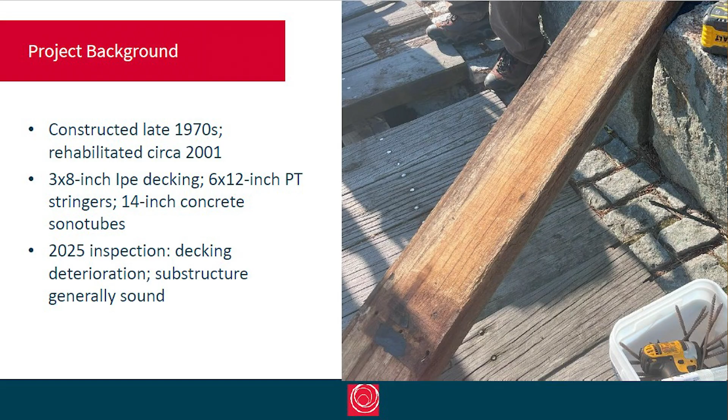The boardwalk was originally constructed back in the 1970s, initially with southern yellow pine. In 2001, a rehabilitation effort was completed that reused the existing substructure - basically anything other than the walking surface was generally reused. At that time, the city replaced the timber decking with 3x8 Ipe decking, a tropical hardwood. Underneath the Ipe, there are stringers that are pressure treated pine, and then concrete sonotubes, or foundations, that extend down into the soil, and that's what ultimately supports the boardwalk we walk on.

This past summer and fall, GEI completed an assessment where we actually took up some of the boards to evaluate them in their entirety, as well as look at the substructure - the stringers, the concrete sonotubes, and other elements underneath the boardwalk. Generally, we found the material not exposed to the weather to be in pretty sound condition, which was a really positive find.

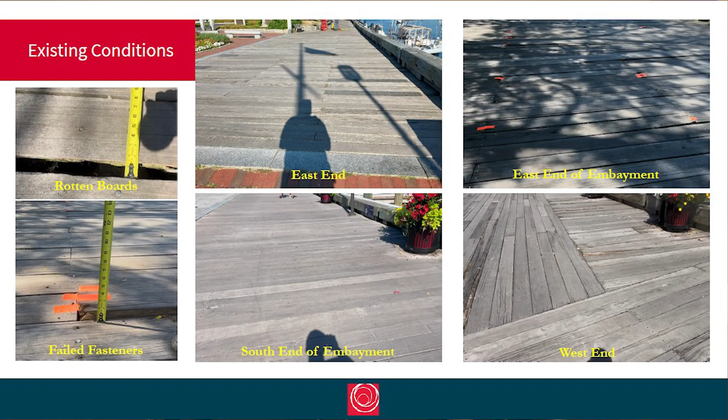Most of you have walked on the boardwalk. There's a lot of deteriorated deck out there. We observed a number of rotten boards and tripping hazards. Those are typically because fasteners that extend down into the stringers have failed—either water got down there and corroded the fastener itself, or the timber has failed in that immediate location. So those were the main items we found.

There's also some transitions between the hardscape around the edges of the boardwalk and the timber boardwalk itself that create elevation changes, which are potential tripping hazards. We also found some areas of the decking, particularly at the southern end of the embayment, that were really in pretty good condition and don't require a lot of overall attention.

So we tried to really holistically look at the boardwalk itself, evaluate what its current condition was, and identify the areas that could potentially be reused, and areas that would need some future repair work.

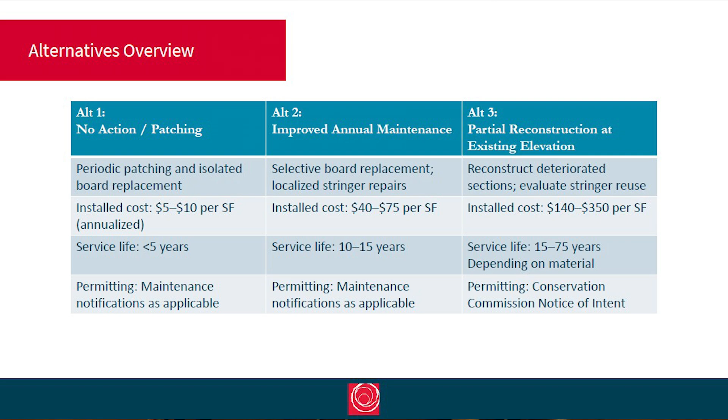Our tasking for the feasibility study included three alternative evaluations. The first being that we don't do anything other than what's currently happening out there—basically periodic patching. The second alternative is improved maintenance: securing timber out there, refastening, being much more proactive in the approach. The final alternative is to partially reconstruct the boardwalk at the existing elevation.

Each of those have different costs associated with them, as well as their overall service life and required maintenance on an annual basis.

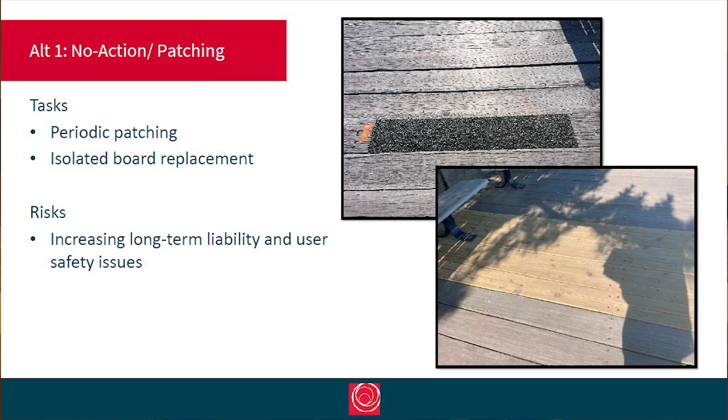So alternative one, the no-action patching, would just involve going out there as currently exists, periodically patching. Some of that is replacing timber boards themselves, or using—you'll see some areas out there with flexible pavement, kind of like a rubberized pavement—or other alternatives.

This really has long-term liability risk for the users out there. We're going to continue to have safety tripping hazards consistently popping up. But it is an option—it's the lowest cost option that is out there.

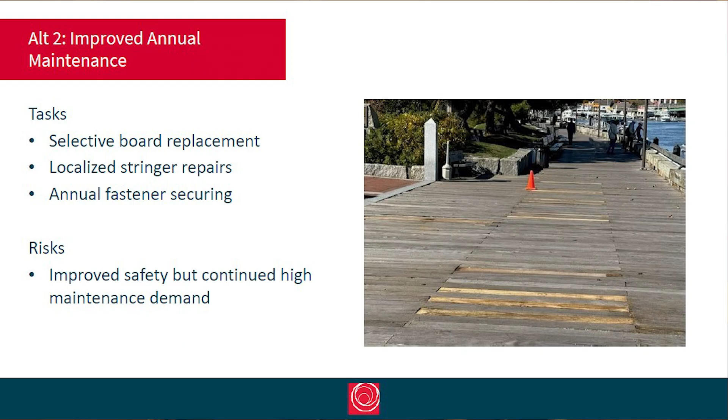Alternative two is improving annual maintenance. This would involve going out there, selectively replacing boards that have rotted. If there are stringers needing repair, working to replace those stringers, and then securing the fasteners and providing annual fastener maintenance that would secure the boards down and eliminate some of those tripping hazards.

This improves safety, but it also requires additional maintenance on an annual and ongoing basis. So when we say annual, that could be multiple times a year that the city or Waterfront Trust is out there proactively making repairs. So it increases a lot of demand and effort on their part.

I will say that as part of this feasibility study, Waterfront Trust and the city have gone out there and done a proactive maintenance repair recently this fall, securing and installing about 200 fasteners in the boardwalk, and replaced and repaired some of the boards that are out there. Within the next couple of weeks, there will be some additional timber getting installed.

As part of this effort, we've identified some areas that needed repair, and there's an opportunity to complete some of those repairs.

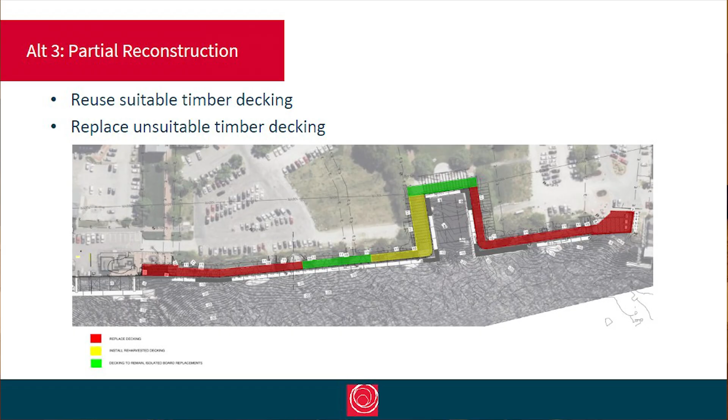The final alternative we've looked at is a partial reconstruction of the boardwalk. This really looks at our holistic approach of what can be used out there. Some of the timber is in really good condition, and some of it is deteriorated. So if we're able to reuse that timber, that provides cost savings as well as increased sustainability.

Within this image, the two areas shown in green were found to be in really pretty good condition. They would have minor repairs needed, but we don't anticipate having to do a holistic removal and repair effort in those two areas.

The areas in yellow and red have quite a bit more widespread deterioration of the timbers and fasteners. So we would look to remove all of these timbers within this area, and then selectively re-harvest as much of that timber as possible.

Our goal is to reuse about a third of that material, placing it within the area colored yellow, so that you have one continuous area of existing Ipe decking. The two areas shown in red would be replaced with a new timber boardwalk.

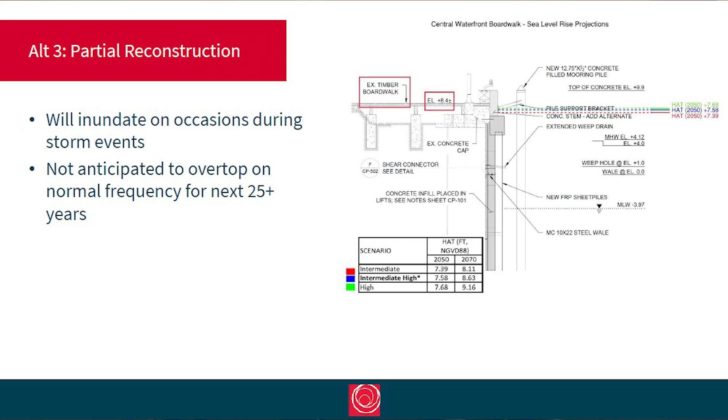We also looked at the elevations of the boardwalk as part of this, and we do note that the boardwalk during storm events may inundate from time to time. However, for the next 25 plus years, we don't anticipate that the boardwalk will overtop at any normal frequency. So as part of the recommendations here, is to keep it at the existing elevation of the boardwalk as it is.

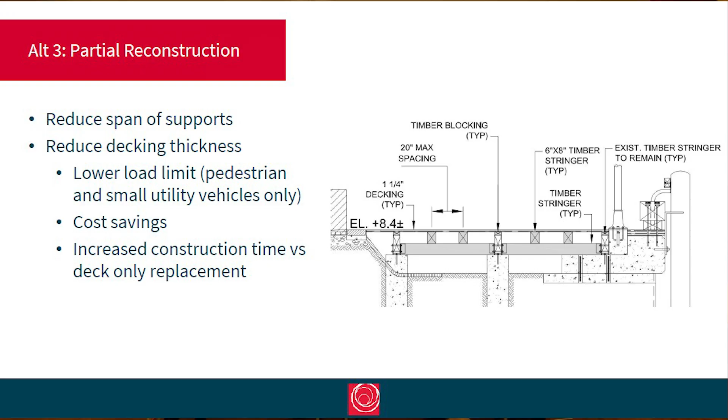Today we've also evaluated the existing substructure. Some of our recommendations are to potentially look at reducing the span, this would be evaluated further during the design phase. The spans between the stringers are really pretty wide, about 5 foot typical spacing, and that works for the relatively thick decking that we've got out there and the loads that we've got.

But it's an unconventional framing for what is often used for decking structures. So we looked at the potential of reducing those spans, and this would add some additional construction time to the project on site, but would reduce the material cost of that decking. For instance, instead of having a 3-inch thick deck, that deck might be 2 or even 1¼ inches, which is a typical thickness that you would see on most decks that you're familiar with. So there's some potential cost savings there, and really kind of evaluating what those are.

We also looked at what the use is of the structure in this evaluation. The boardwalk is not used for vehicles. We've got a couple of small maintenance vehicles that go out there, and it's mostly pedestrian movement that is on the boardwalk.

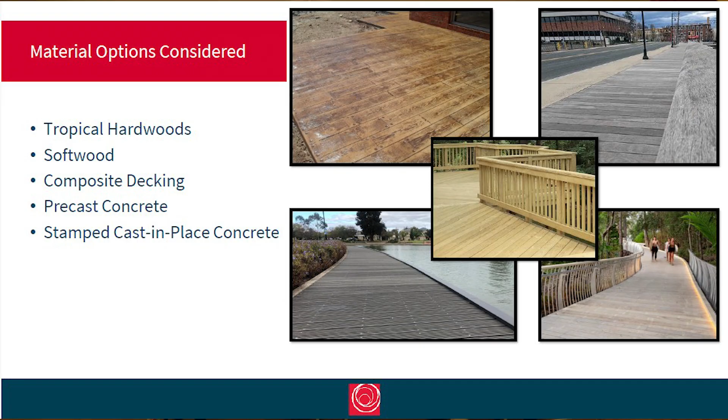Next, we evaluated different material choices for the boardwalk. Currently out there is Ipe, which is a tropical hardwood. Before that, the original construction was a southern yellow pine that was pressure treated, and both of those have lasted about 25 years. We were hoping to be able to get a little bit longer service life out of the tropical hardwood initially, and there is still some nice longevity, but it is starting to require additional maintenance.

So the different materials that we've looked at are tropical hardwoods, softwoods - this would be like your southern yellow pine - composite decking, precast concrete, and a cast-in-place concrete where you'd actually raise the elevation and place the concrete on the surface. We looked at all of those through a number of conversations with the city and different stakeholders, and identified that the concrete options really don't fit the city's aesthetics and really needs for a boardwalk along this historic waterfront. So from there, we've evaluated them and really kind of moved on to the other top 3 choices.

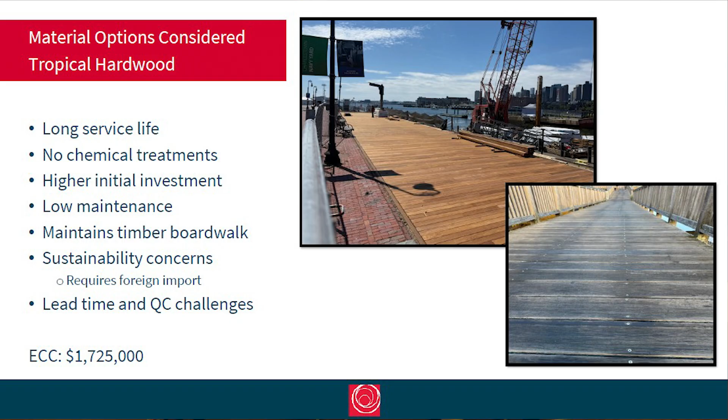The tropical hardwoods, this would be an Ipe. This is actually a piece of Ipe that is out there as an option. Purple Heart, down at the end, is a piece of Purple Heart. There's a connection part of the rail trail over by Cashman Park that is using the Purple Heart currently, so it's another option that we've got within the city here.

These are both nice options in that they have long service life. They don't use any chemical treatments, but there are some challenges with them as well. They're expensive. They have sustainability concerns because most of the tropical hardwoods are coming from either Brazil or Guyana, or imports that if we've got any, we run short on material, they can have high lead times. There can be quality control issues with getting some of the material here as well. And so these would all have to be factored into the overall construction.

The estimated cost for the tropical hardwoods would generally be about 1.8 million dollars to replace the areas that are in red and yellow. That's just material and construction costs, so that includes the overall construction of the boardwalk. So it's reharvesting what we can that would go into the area within the yellow, and then the areas within the red would have new material of a tropical hardwood.

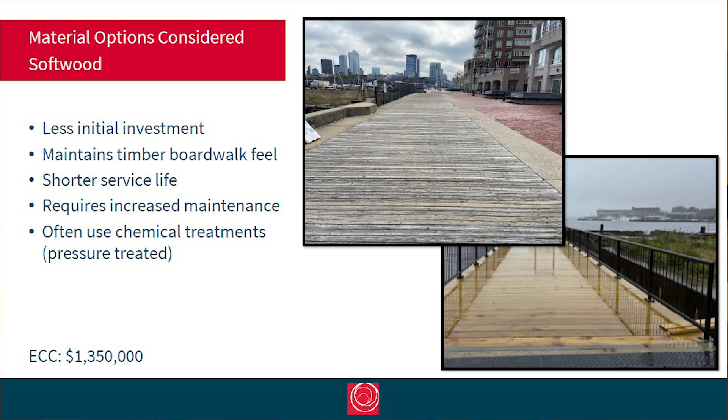We also looked at softwoods. These are less expensive, so there's a lower upfront cost to them, but it's also important to know that the upfront cost of the materials is only a portion of that cost. There's also cost for the labor and the equipment that really do add quite a bit to the overall cost, so there's not as much differential as you might think. The softwoods would have a shorter service life, generally on the order of about 15 to 20 years, versus the hardwoods which are going to be on the 25 to 50 year time frame.

So the other disadvantage is that they're going to have chemical treatments, typically they're going to be pressure treated in these areas, and really, they do weather pretty quickly. As you can see here in the two photos, the lower photo is a picture of a freshly installed pressure treated southern yellow pine, and the upper picture is within the same area here, but this was installed about 10 years ago, and you can see that it's quite weathered. The overall estimated construction cost for the southern yellow pine softwood would be about 1.3 to 1.4 million.

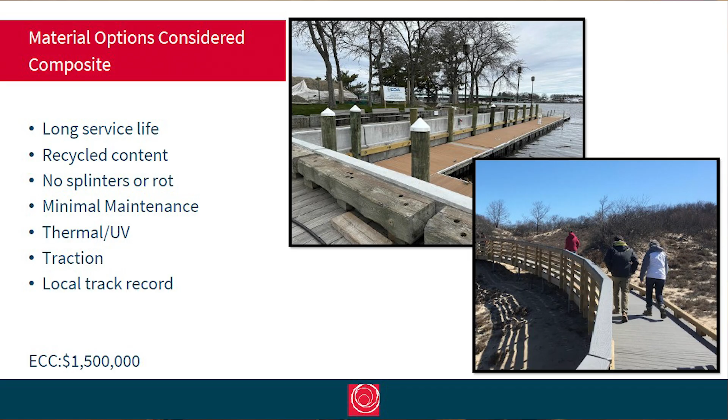It is, yeah. So with the softwoods, they do have increased maintenance. They tend to unravel and open up within their grain quite a bit more. So there's more opportunity for splintering and rot within them versus the tropical hardwoods, or a hardwood, which is going to have a much denser grain material to it.

And then finally, we looked at the composites. A composite has come quite a ways, even over the last 10 years from what it was. They've really started to come into the market quite well when you start to compare them. You're going to have a long service life - we're looking at 30 to 50 years. Often, you can even get commercial warranties on these materials in that 30-year time range.

They don't have splinters or rot associated with them. Their maintenance is really low. There are some items we'd have to make sure are addressed within specifying the materials selected, primarily UV protection and traction - making sure they're not a slippery material. And we've got some different materials out here you can take a look at afterwards.

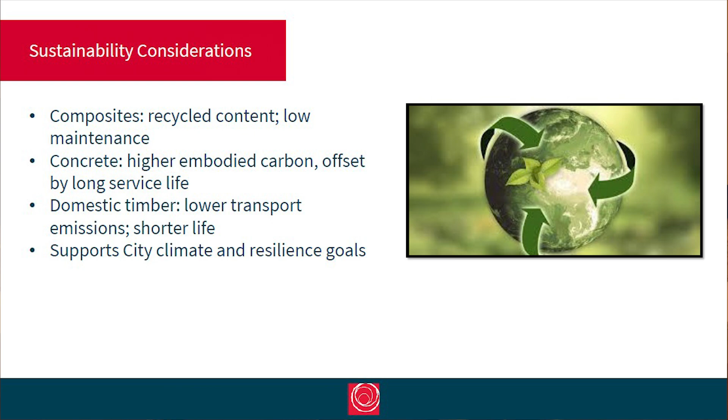So looking at this, we really kind of are trying to also keep in mind a lot of the sustainability considerations - looking at recycled content, being able to reuse where we can. Within the composites, having low maintenance and using recycled materials. The domestic softwoods are going to have low transport, so they're going to have lower carbon footprints.

The concrete as well as the hardwoods are really going to have high embodied carbon because of the travel and work involved with those. So trying to provide resilience goals and achieve a sustainable project here for the city has been one of the other considerations.

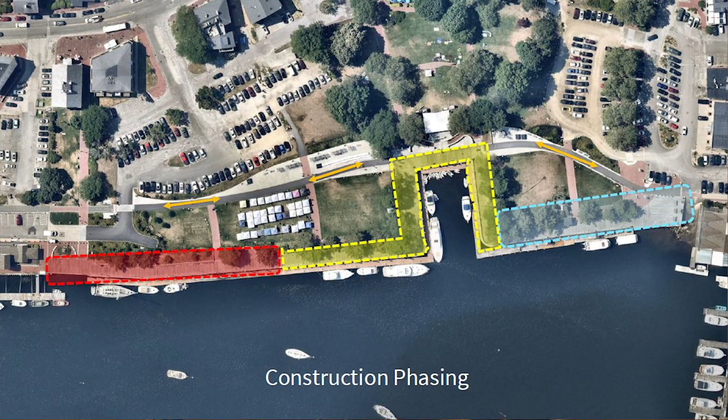Looking at this from a constructability standpoint, this would be a phased project. We wouldn't be looking to take out the entire boardwalk all at once, because we understand this is an important aspect for the city, visitors, and residents to access the waterfront. We'd look to do it as much as possible during the off season, when there's less foot traffic, phasing it into at least three phases, all while having the new park access way that runs directly behind this boardwalk available. So we wouldn't be shutting off the entire waterfront - you'd be able to circumnavigate around it through the construction phase.

As the design progresses, we'll really be looking to develop and hone in on what that construction phasing looks like, as far as where materials will be stored, what time frames we'd anticipate different areas being taken down and constructed, and ultimately how any equipment and construction would be able to access those areas.

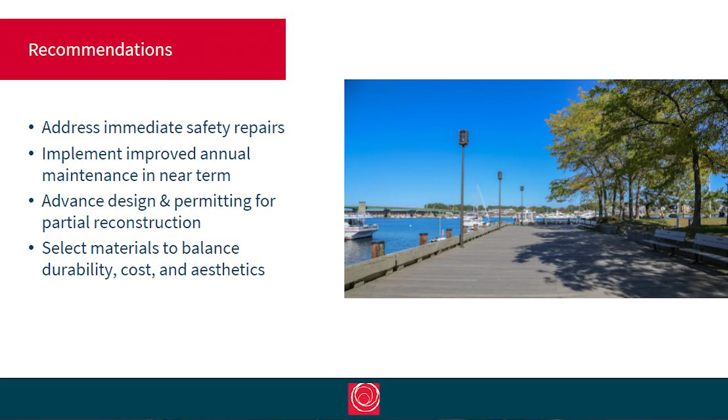Overall, our recommendations are to address the immediate safety concerns out there, implement improved maintenance in the short term, and ultimately advance the design and permitting required for partial reconstruction. Then work with the City and Waterfront Trust, as well as your input, for developing and selecting a preferred alternative that will meet the aesthetics, cost, durability, and maintenance considerations for the city.

With that, I appreciate the time, and we'll turn it back over to Jordy for any questions and public comment.